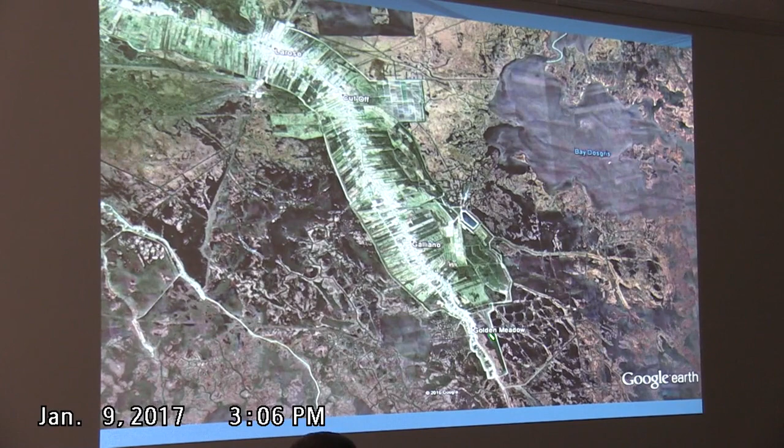But again, there was a New Year's a year ago that we were still very concerned about. This is the Yankee Canal levee. Of course, this area and the bay is not on the pump, everything else is on the pump. This levee was about barely a 2-foot elevation, and in a couple of spots it wasn't wide. When the water elevation got to 1.5 feet, it wasn't wider than maybe 18 inches. So now we have a 5-foot levee, and the crown is right at 10 feet. So that's one area that was scary last year, but it's in great shape right now.

The other scary area is over here in the coastal canal where we had the sheet piling project going on. Of course, we had to cease and desist from the Corps.

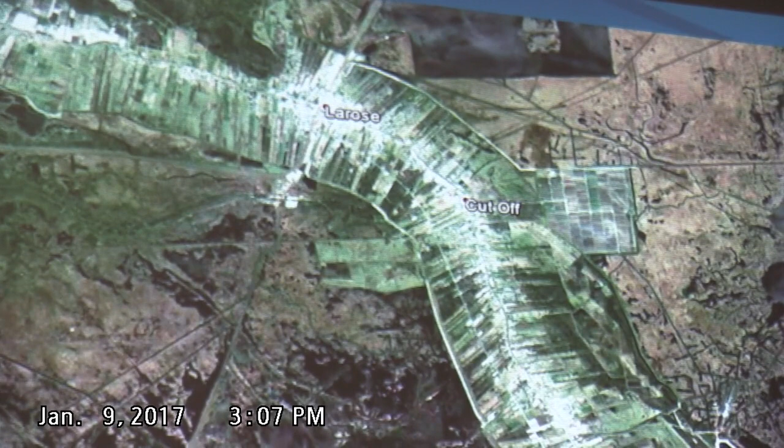We went to get them to take it off of us because there was one area that was extremely weak, and we were truly concerned about it. The Corps agreed with that, and we got that done a month and a half ago. The key thing is the contractor was there with equipment. Had we had a storm, he could have worked 24 hours and taken care of that problem.

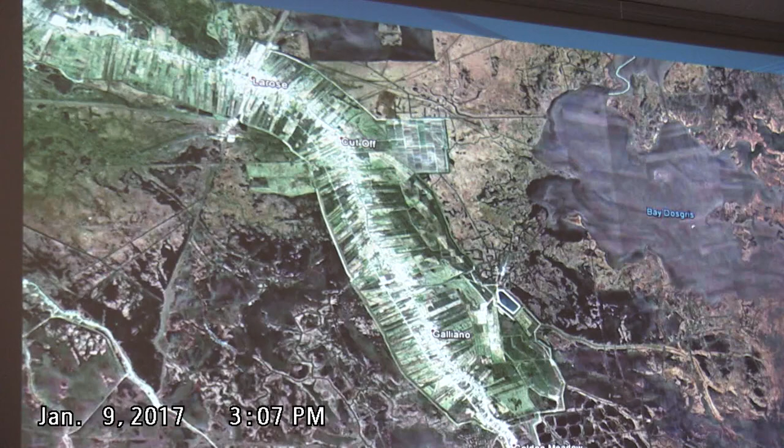Now we just have one little gap left to do where the shipyard was. He's going to leave that open while he continues finishing the other part of the job, where he has to put in sand and put rocks on top of the sand between the old wall and the new wall. There we've gone from a 7.5-foot level of protection to 13 feet.

That was kind of critical because with those big slow storms, we're going to get the same amount of water here as up here. It would have been a shame to keep the water out everywhere else and have it flood the whole system from up here. But that's in place now, so we'd have to be really unlucky for that type of thing to happen. So those are 3 major things that were done for us this past year.

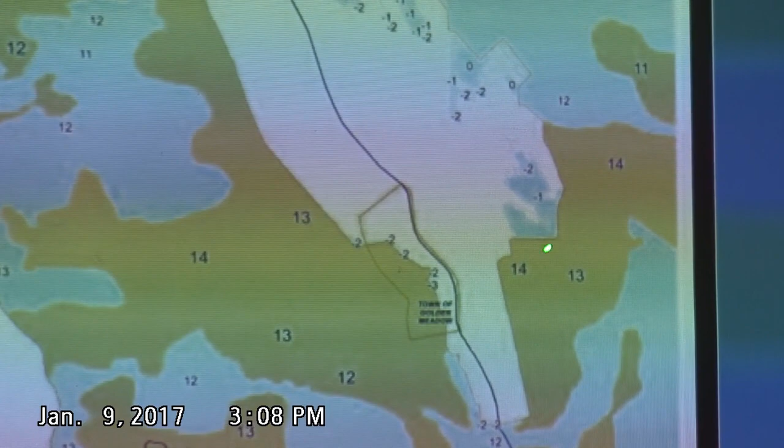The other thing we received is the map from FEMA and the flood insurance program showing the elevations on the outside of the system. The outline doesn't show real well, but we basically show 9 feet up here, 13 on the west side, and it's all different over here. They think the water's going to stack up to 13 here, showing 13 over here but 12 to 14 elsewhere. Here we have our levee at 18, and up here we're in the ballpark of 15 and 16, and we're going to continue working on it.

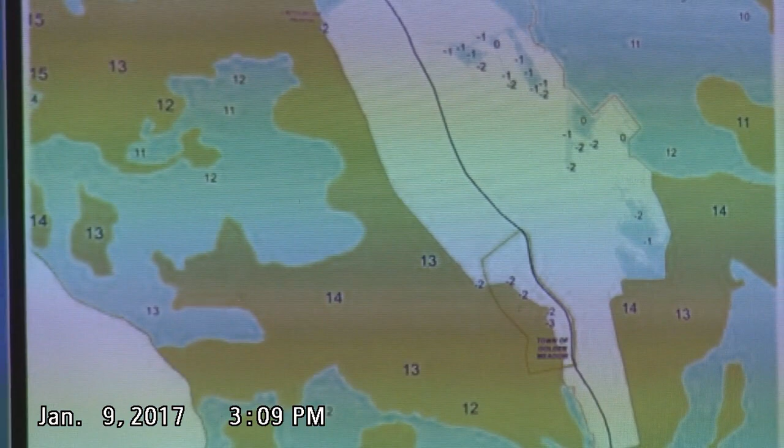What's important is now we have a map. After Katrina, we just decided to build as big a levee as we could afford, as high as we could, and figured 16 on the south end and 13 on the north would work out pretty well. These computer models, 10 years later, show us we were pretty much in the ballpark. Our goal now is to keep at least 1 to 2 feet above that outside elevation, which means we'll need to do a little bit of work globally and a bit in the corner over here. Most other places, we're sitting in really good shape.

We will continue our project, and we can have 18 up to here, 16 around here. We have a good chance of getting to 16 all the way through here, since they show 13 here. With the projects we're about to get started this year, it might take a couple of years to get there, but we're in good shape.

We're still able to get the benefits of our flood insurance program right now. We're returning money to people because there was a slight change in the law, and we're looked at as a reduced risk area because we hadn't flooded it since 1985. So I'm hearing people are receiving some money back on their flood insurance, and that's going to continue. With this LAMP program, it looks like we'll be able to keep that advantage.

We still have not been certified by the Corps of Engineers, and that continues now. But the LAMP program will allow us to get the benefits of the system we're building, and we need to continue to make sure it stays at the elevations we've designed it for. Any questions?

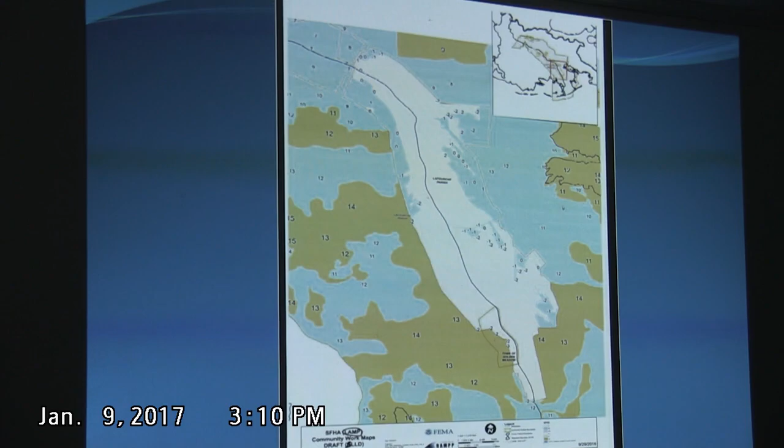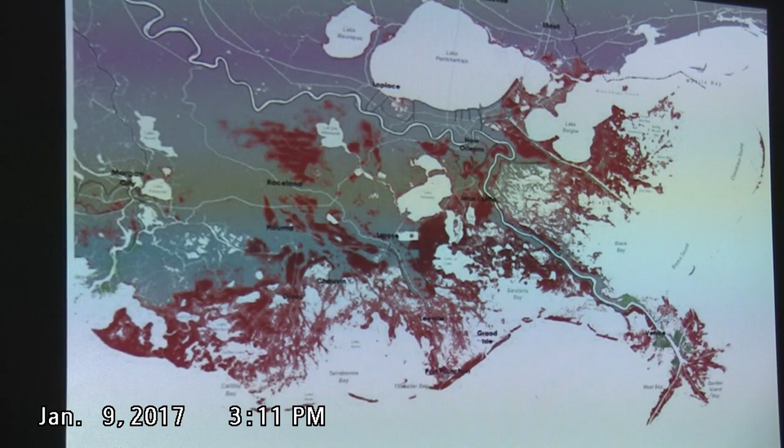This past couple of weeks, the CPRA, the Coastal Protection and Restoration Authority, the state, released the master plan. With sea level rise factored into their computers and subsidence still the controlling factor, they're saying if we don't do anything, these red areas that were land or marsh would turn to water.

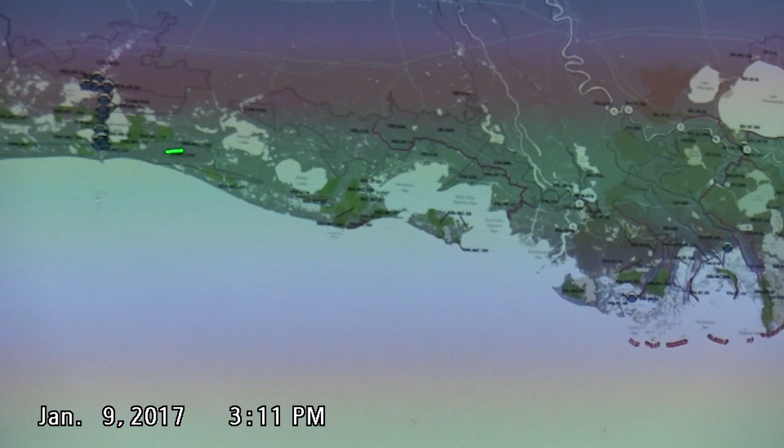Their plan, in this same area, you can see here's our levee system. The red lines are levee systems. What's interesting is we have levee systems over here in southwest Louisiana, but they show no structural protection there. They're talking about just helping people to move out, basically.

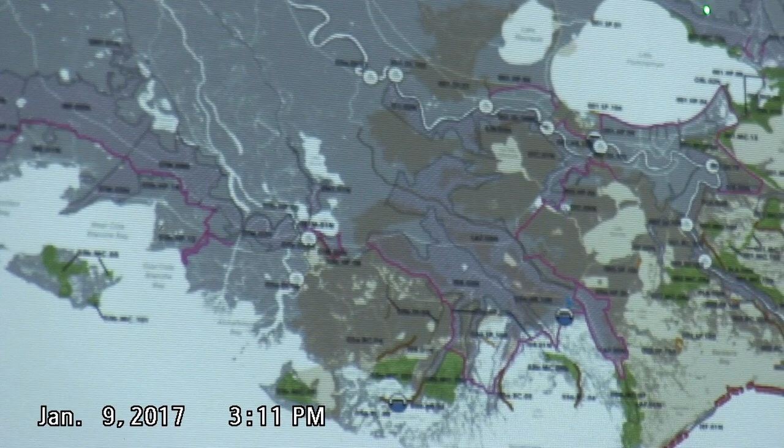You'll also see up in the Lake Pontchartrain area, in St. Tammany Parish, they're saying there are 5,000 structures that they're going to either elevate or help people leave. Now, the plan is a very expensive plan, and the money for the plan is not there.

We are going to have a lot of money from BP to get started, and most of that is going to be just for restoration and not for flood protection. So when we continue doing our work over here.

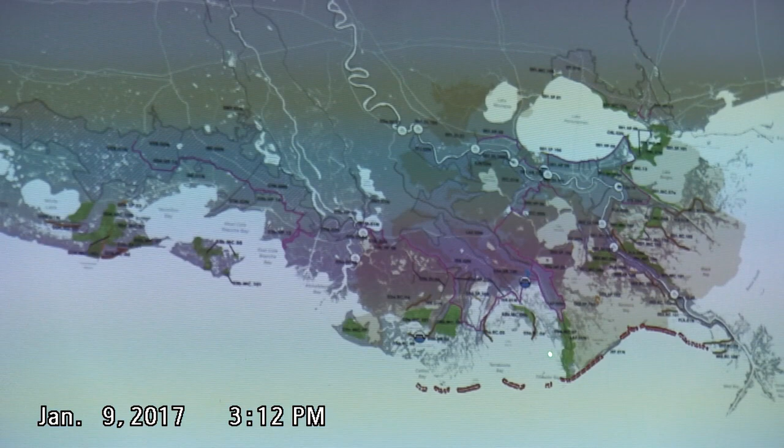Part of the plan is to reestablish the marsh along the Lafourche Ridge. That's critical for a lot of reasons, but if we don't keep this separation between Barataria Bay and the Timbalier Terrebonne Bay, the water is going to be moving around so much it'll cause a lot of problems.

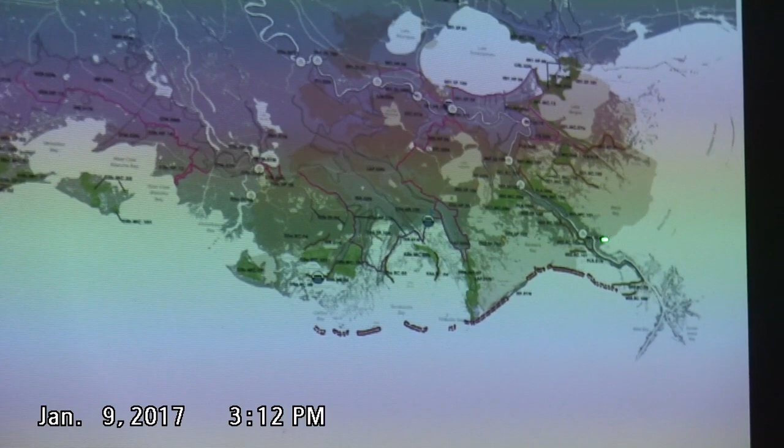For the island work they're planning to do over here, that's real good for us. With Plaquemines Parish being sturdy and the island chain staying in place, that's going to help knock down storm surge before it finally gets to our levee system. That's a real good thing.

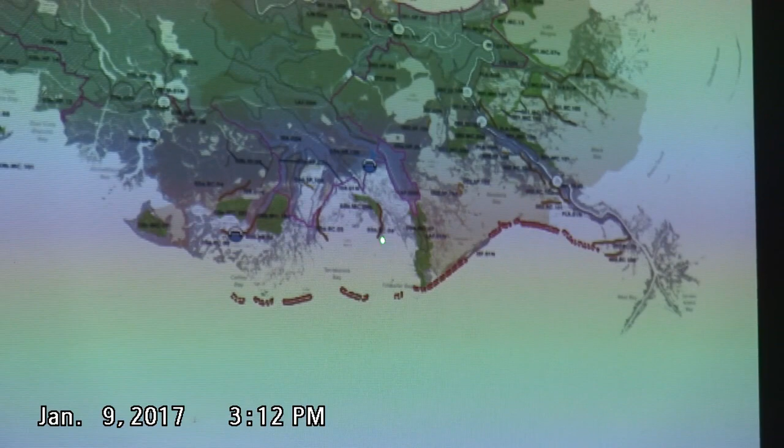One of the issues we have is a storm coming from the southwest to the northeast. The islands aren't very good, and we don't have a lot of strength behind it. They are looking at strengthening the Bayou Terrebonne Ridge. That would be helpful. And if we can get something between the Bayou Lafourche Ridge and Terrebonne Ridge, that could help knock down the water. That's something that, working with other people, we might be able to get going.

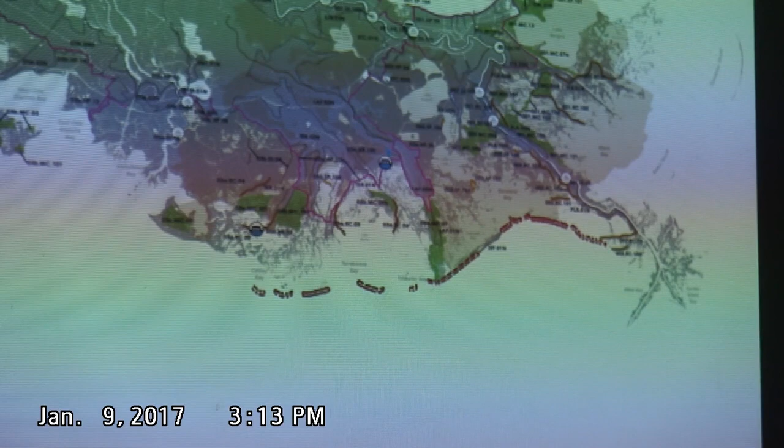But they are saying in this plan, which is being painfully honest, that we cannot restore the entire coastal Louisiana — we will not be able to do it. But what we can do is manage the loss pretty well, and there are places we can keep if we want to. That's really what the plan is about — keeping the areas.

They're shown right here with some different types of projects — the various islands, marsh restoration, and some diversions. They think we can hang on to what's on this picture here. But there are going to be some big challenges all over the place.

And the money is not there to get it all done. The biggest amount of money we have for it right now is the BP oil spill money, and that's kind of a hell of a way to fund your restoration project — hoping you get an oil spill. Yeah, it's not a good situation.

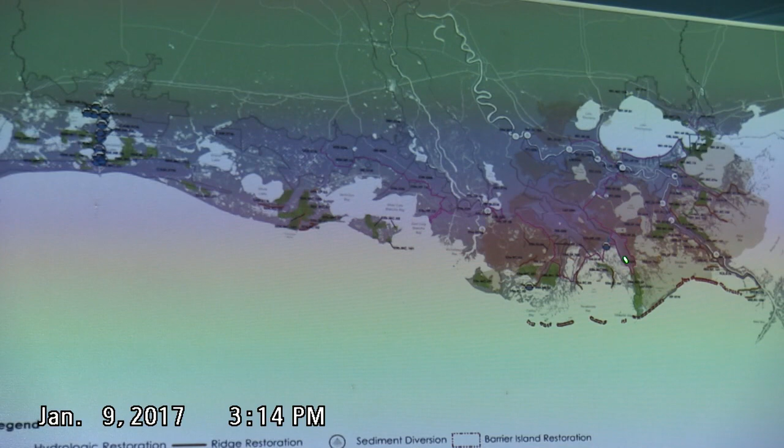But we have been successful, and we are in the plan. A lot of people are not in the plan, and there's a lot of people not totally happy because it doesn't show their project. If a project's not in the plan, the state will not spend money on it. We are in the plan, and they've put a lot of money toward it on paper, but as I tell you, there's not enough money to do all the things that are on this plan.

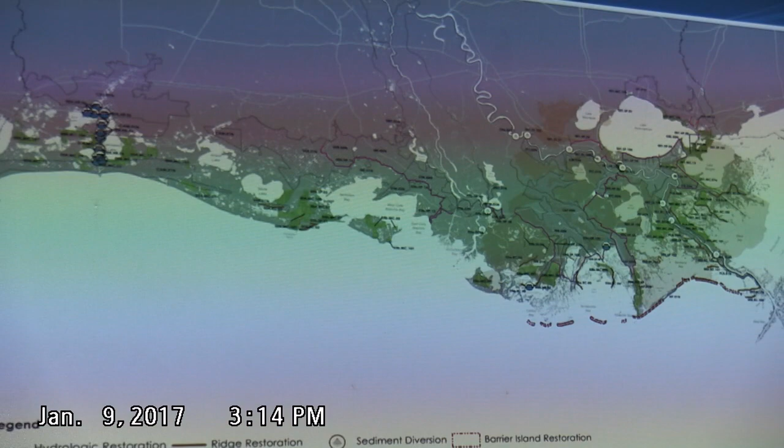This is some of the work we're doing for the Morganza project. There are a bunch of trees along the levee where we're going to build. This is the Grand Bayou, and they started clearing trees, so we decided that getting a chipper instead of just cutting it and trying to burn it would let us get it down without spending as much time and effort.

Here's a machine taking some of the area out and clearing it, and here's a good run — it's ready to go. And there's the chipper doing its work. You don't have to move that stuff around, you just leave it.

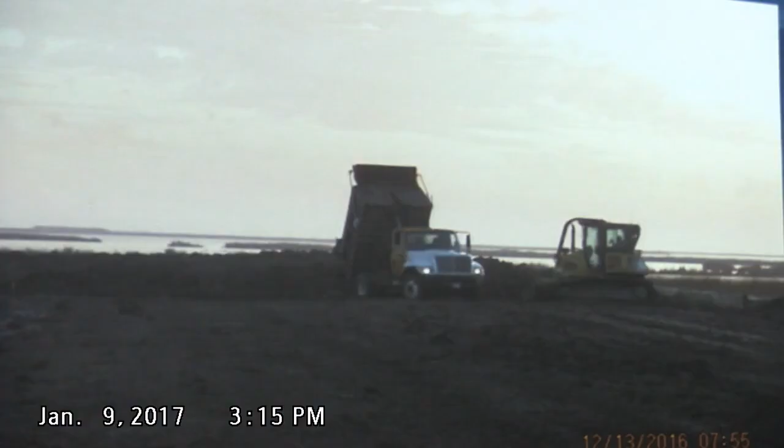That's a little segment at the south end, and the Grand Bayou project should continue from this and go forward. We ought to have plans on Grand Bayou within the month, and then once we review it, possibly get advertisement and maybe get a contract out there by spring. That's a big project — a 6-mile project with material. And again, that's the guys doing the work in the area.

Okay, next item is the LA1 Coalition. We've been a partner with them for the last few years, and we reviewed the membership. It's $1,000 for that membership. I have a motion to approve the renewal of membership.

Do we have to do the cooperative endeavor agreement? Yeah, it's in. We've done this already? Yeah, it's the same over here, same one we've done in the past, exactly the same one.

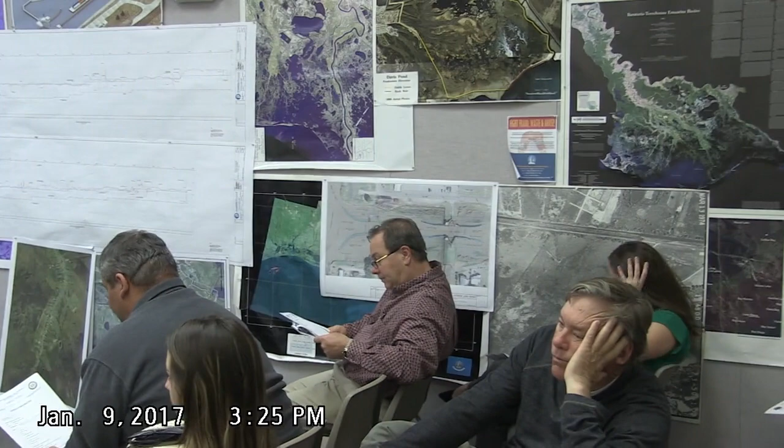Entergy costs to relocate the power pole to the Apache Dock. Every time we get inspections, the Corps has mentioned that we do have that power pole in the levee, right near Apache Dock. There is, the old wall actually sits in there. We don't think there's too much of a threat, that's why we didn't jump on it right away. But now that we're gonna try to get the Corps to approve some of our stuff and also work toward the flood insurance issue, I think it would be a good idea that we do relocate that power line.

It will cost about $17,000. So if y'all approve, we'll go ahead and give the Entergy company the go-ahead to relocate that line and that pole. Expensive pole. Actually, two of them, 17,000, maybe more, it's two of them.

He's making a recommendation to our general manager to expend $17,000 and some odd dollars to Entergy for the relocation of poles that are in our area right now. Moved by Mitch, second by Bob. Any discussion? All in favor, signify by saying aye. Opposed, no. Motion carries.

Okay, getting approval to pay the cost, it's actually 15,851 dollars to relocate a Vision Communications cable at the Ontario lot. We're working to raise the road where the gap is. To do that, we have to move the vision cable out of the way. Even though we don't have the advertisement out yet, if we don't do this now, it'll slow us down when we finally start getting the advertisement.

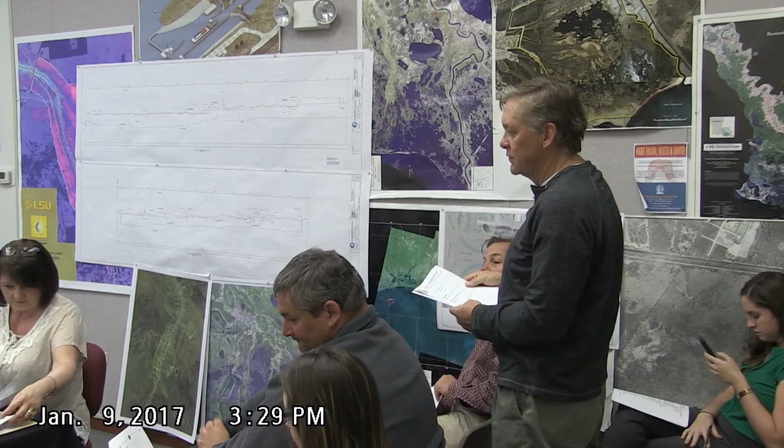On the elevation at LA 3235 at Highway 24, we did answer all of CPRA's questions. We have a conflict between facility planning and DOTD's comments, and we're working to resolve that with DOTD right now.

I expect any day now we should have that resolved, and we can go out for bids. Once that's resolved, we'll get a permit from DOTD, and we'll get approval from facility planning for the running. So we got a shot to get it done August 15th?

Yeah, I think so. On the mechanic shop, we did receive bids in December. We do have a low bidder, a contracting group from Thibodaux. The contract documents are complete with the contractor, and we're scheduling a pre-construction meeting for next week.

We'll start sometime probably next month. Money-wise, you were doing great, Joe, till you got to the third. Well, you don't owe this money right now, that's a total. I know that, but we're gonna have to spend it eventually.

So at this point, you're just informing us. Yes, sir. Okay. Any questions of Joe? That's it? Any questions of Joe in the presentation?

If not, we'll move on to Jay Wayne. So our permit for the water control in Golden Meadow, we got just about everything, and that permit is good now. We're waiting on geotech to handle the Corps. He's asking us about how we're gonna tie in our mechanical levee to the levee. We've got a good check on, doing the work right now, we're waiting to come up with some results.

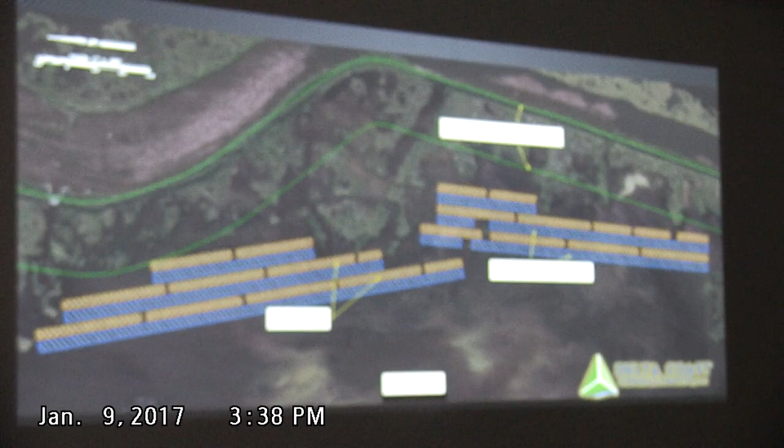This just kind of shows you what they're doing. They're borrowing the material adjacent and building these terraces. We normally have a cut in them every 750 feet, or no more than 750 feet.

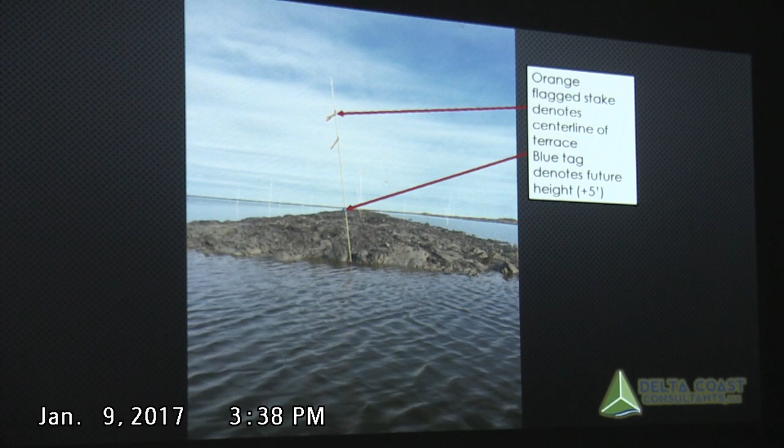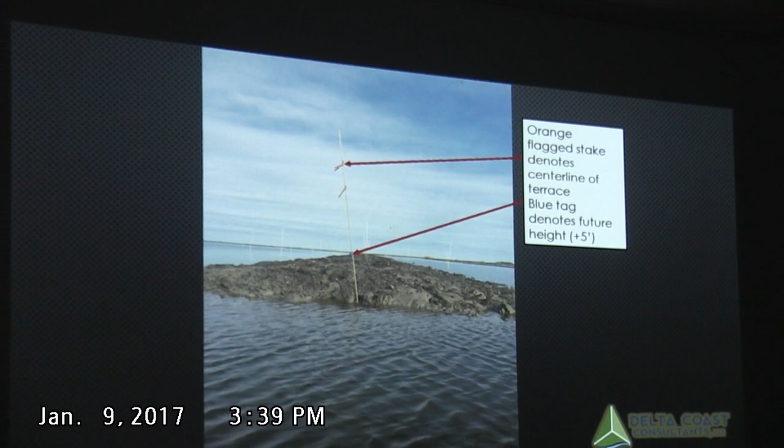Just to give you an idea of about what they look like now. Bethany, who's with my office, took a trip out there on Thursday. Bethany is from Cut Off. Right. Catching fish while you were there? I was very tempted. Everyone needs the one from Lafourche Parish. That's right, we all know Lafourche Parish is better. Thank you for admitting. Yeah. Most of my office is from Lafourche.

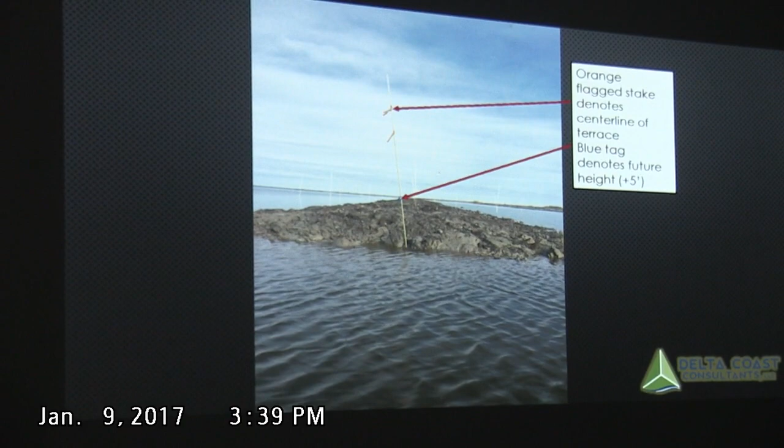I guess it's successful about what we're doing. Yeah, the little blue flag shows the final elevation on these terraces, which is 5 feet. What we're doing is building them to 5 feet because we know they're going to settle, and hopefully they'll settle down to about 2.5 feet, which is what we expect. For mitigation and credit for having functional marsh, they don't count anything above 2.5 feet, so it's got to be 2.5 feet and less to be counted as marsh. That's how we design these things, to have 50 feet or so of width at or below 2.5 feet, and then they count that as functional marsh.

Interesting enough, as we're going through new permits right now, they're starting to tell me that if I want to do terracing, I have to build even more than what we originally requested, because they don't like terracing as a form of mitigation now. So those are the different hurdles that we have every day. What we do is go out and lay these things out with cane poles, and the operators know exactly where to build and borrow from here. And you can see that.

The spacing between them is about 180 feet center line to center line. They say it takes at least 300 feet for waves to start building up, so we're stopping any wave action in this zone.

And we've seen how well these have held up on the other side of the Pointe-aux-Chenes Wildlife Management Area. But anyway, we're going to keep doing this, double teaming it with North Lafourche's machine and Terrebonne's machine till we get all this done. And this is not the only mitigation project.

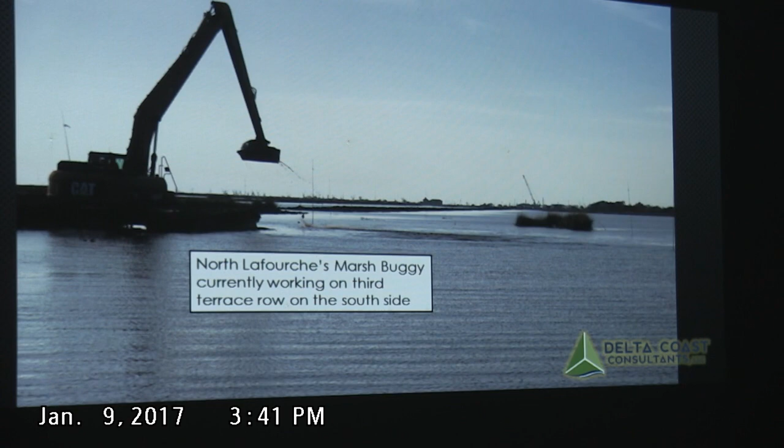I think he's got some stress cracks in his boom. That happens when you're doing this much digging and that much work. We've seen it a lot on the work we've done on the other side.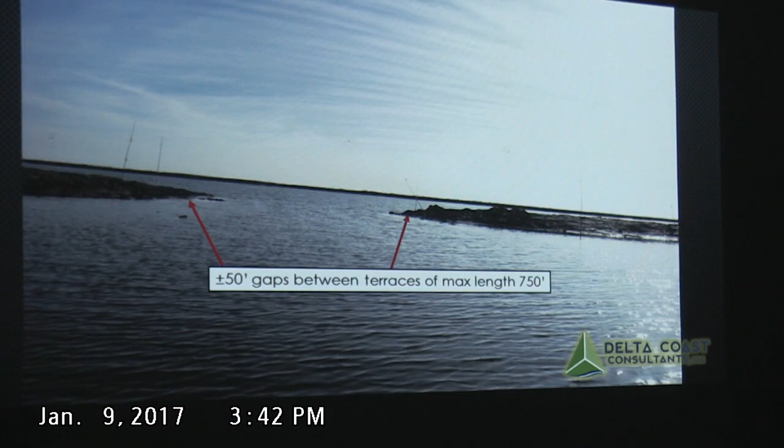But it's really starting to shape up good. That's about probably 2.5 feet. We're looking at what they've got standing up now, so we're going to have to make another lift before we get some complete sections there.

I'll go there. If you have any questions, you can stop me and ask me. That's it, I just wanted to give you a little visual of what we got going on over there.

Go ahead. I'm just saying I don't have anything on any of the other projects. Wendell gave you a little update on what's going on there.

We are starting to meet more frequently regionally with Matt to set priorities for what needs to get done. Reggie gave a little talk in Thibodaux in front of Big a few hours ago, and how important it is to close off that gap.

Not so much for South Lafourche, but for North Lafourche and for Terrebonne, to get the Grand Bayou floodgate built, the Bayou Blue floodgate built, and those levee sections. We have a 1.5 mile gap that we need to address, so that's going to be a high priority for us. It's a high priority ask in our capital outlay request for this year.

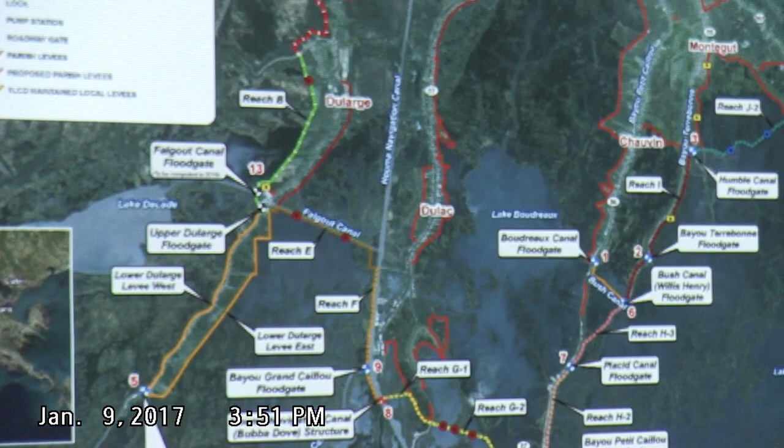But the structure we're talking about today is the Grand Bayou floodgate structure that sits right in this area. Pointe-aux-Chenes floodgate is under construction to the south, and then we have the Apache Farms area, Reach L and Reach K, which is under construction by All South. This is Reach L here, and our Grand Bayou floodgate structure sits right in between those two segments.

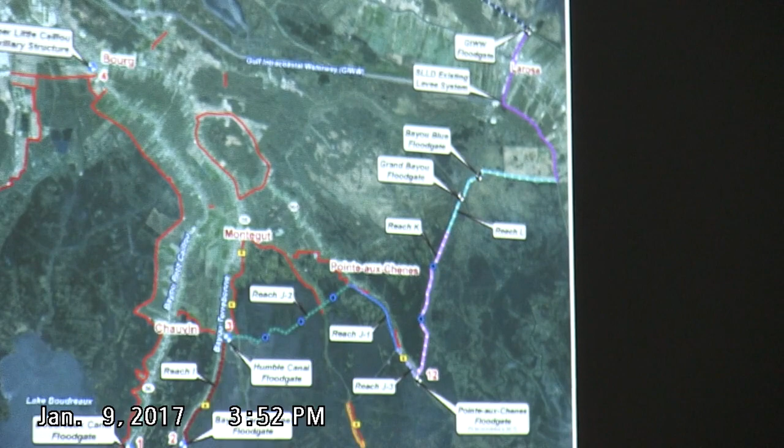So this is a blow-up of that area again, showing Reach K here, the Grand Bayou floodgate structure here, Reach L, and the segment that Neil has under design, Reach L here, and the Bayou Blue floodgate, which he has under design, and the Apache Farms area, which CPRA is handling. So that tells you geographically where the floodgate sits.

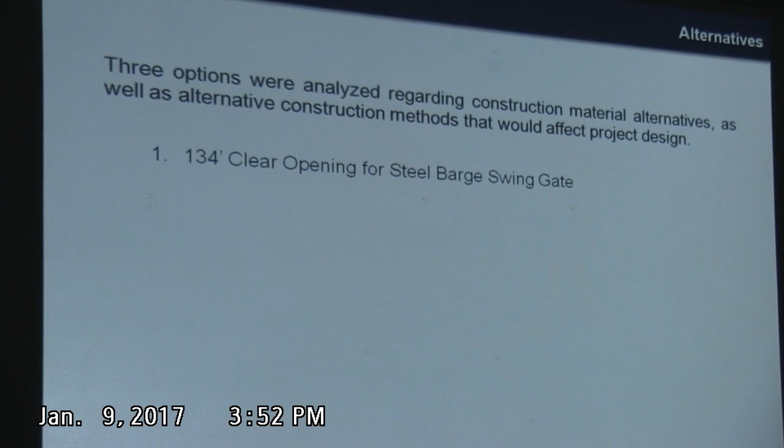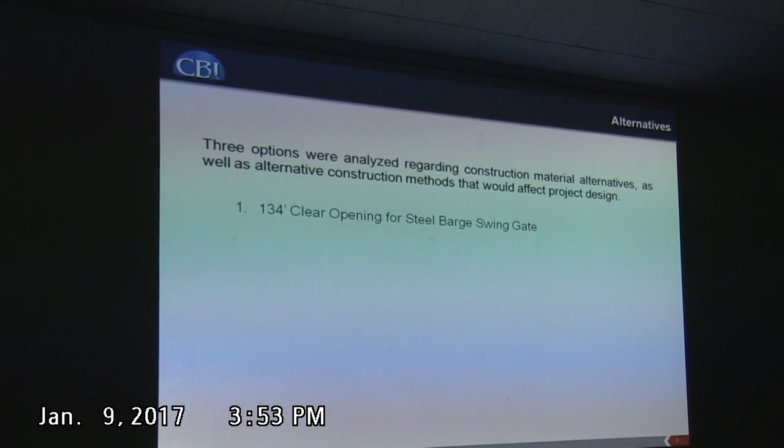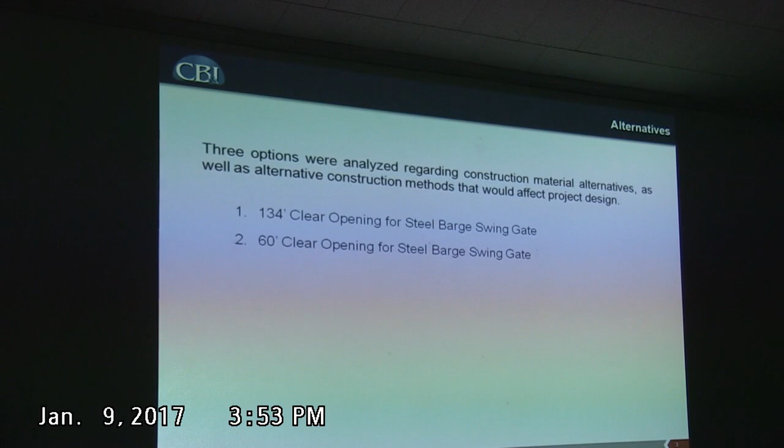As I've talked about in previous months, we looked at 3 options for the floodgate structure. The report talks about a 134 foot steel barge gate — we're talking about a 134 foot clear opening when we speak about the size of the gates. So option 1 is a 134 foot clear opening with a barge swing gate that comes out of that opening. Option 2 is a 60 foot clear opening with a steel barge gate with 5 sluice gates. And option 3 is a 56 foot clear opening for a double leaf sector gate. So those are the 3 options we looked at.

When you look at a 134 foot clear opening for option 1, it yields a 146 foot long, about 40 foot wide, about 30 foot high steel barge gate to a top elevation of 18. It's a 17 foot hull with a 13 foot steel flood wall on top of the deck to get you 30 feet high.

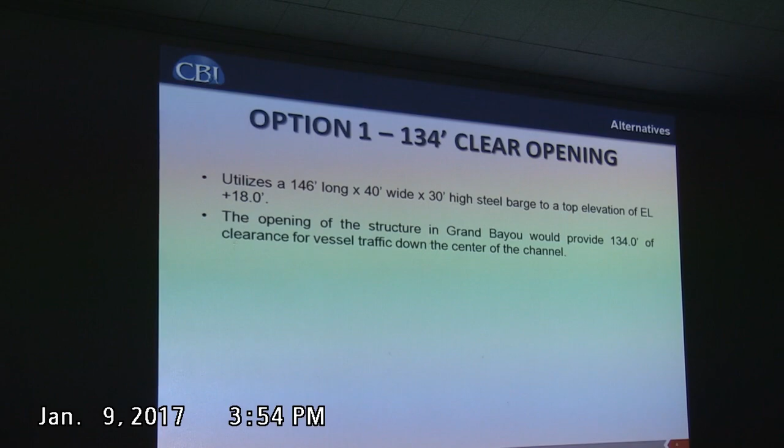So that's option 1. This is a site plan, and I know it's a lot here, and when we get into our recommendation of the structure we're recommending, I'll show you some drawings that we put together, which will give you a better visualization of what all this is about.

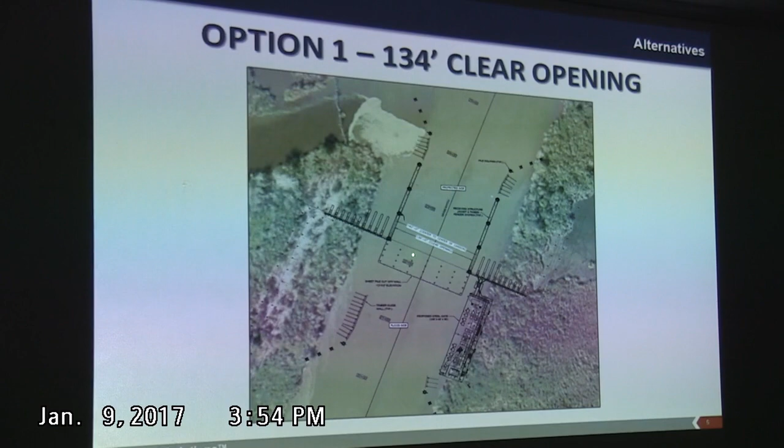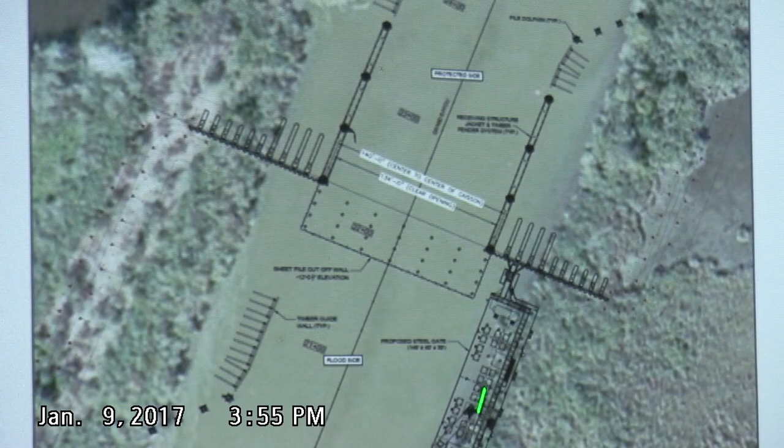Some renderings we put together, but this is just a plan site view showing the steel barge gate in the open position, stored position here. Again, this is Reach K here going to Pointe-aux-Chenes, this is Reach L coming up to Larose. The steel barge gate is in the open position. These are storage areas with vertical piles in each of these areas, the storage area and the landing area. Of course, timber fender system, navigation system along this area, and navigation pile clusters here and along these areas. And then all of this would be dredged to a -12 elevation.

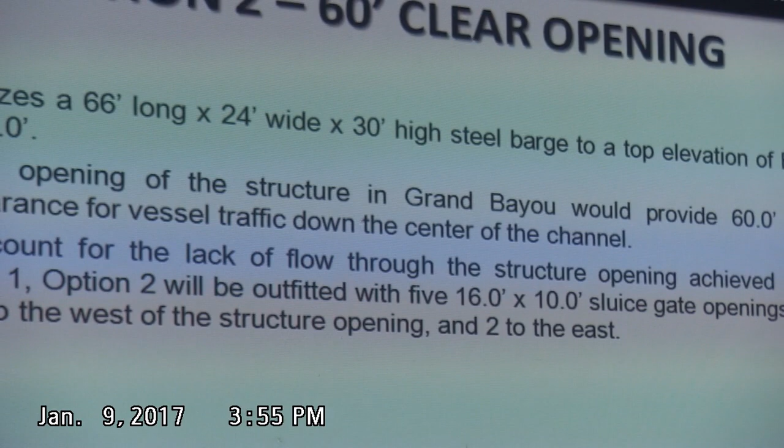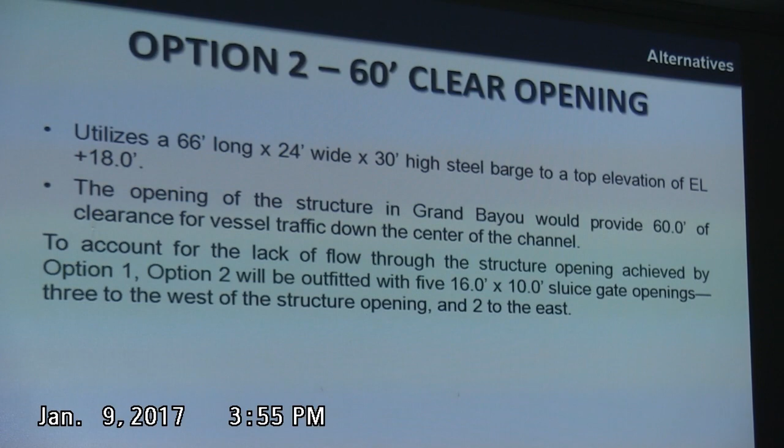Looking at option 2, for a 60 foot clear opening, it utilizes a 66 foot long by 24 foot wide by 30 foot high steel barge gate. Again, all these structures are to an elevation of 18 feet. Now, option 2 does include 5, 16 by 10 sluice gates for hydraulic reasons.

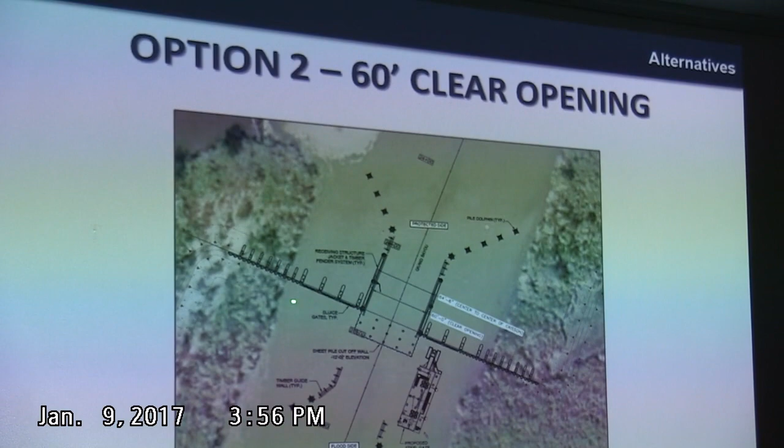Again, this is basically the same site plan showing how that lays out, with the steel barge gate in the open position, and similar structures as we have for option 1. The sluice gates would be constructed in this wall — 3 on this side, and then 2 on this side. And that's the other thing: this is a steel sheet pile braced wall that extends from here all the way to tie into the levees on each side.

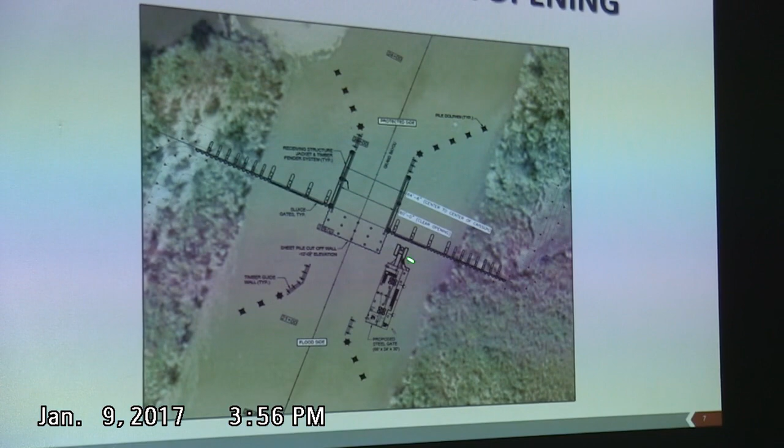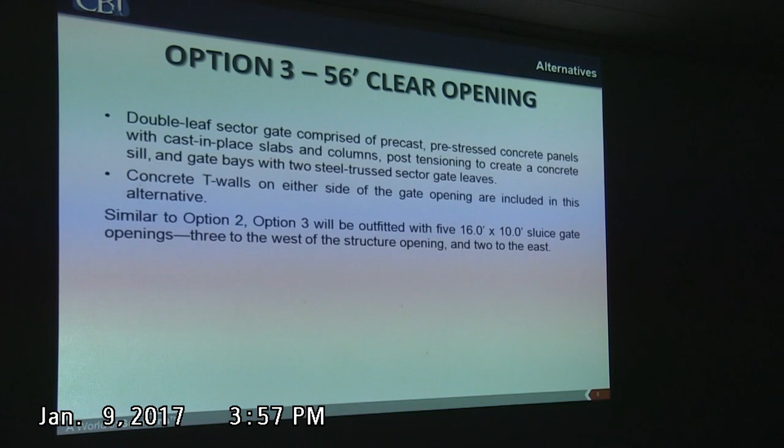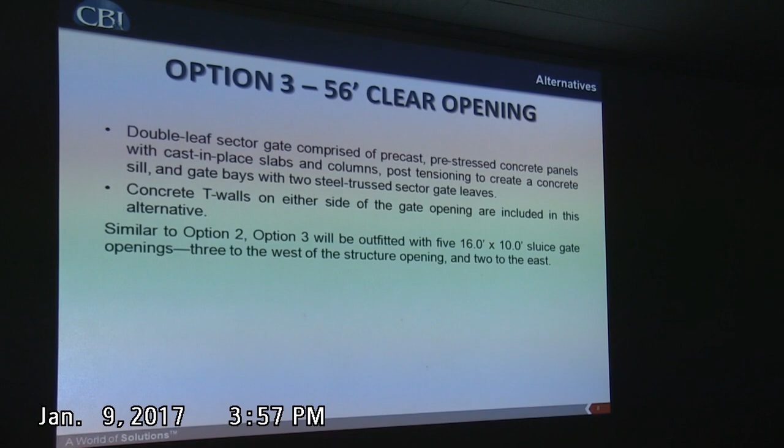And then finally, option 3 is a 56 foot wide clear opening for a double leaf sector gate, which is concrete T-walls, precast concrete panels on each side, with a double leaf sector gate. It's a more complicated structure to construct — it has to be built in the dry. We'll have to build a temporary retaining structure, essentially a cofferdam, to construct this structure. So it's much more complicated, and therefore more expensive as well.

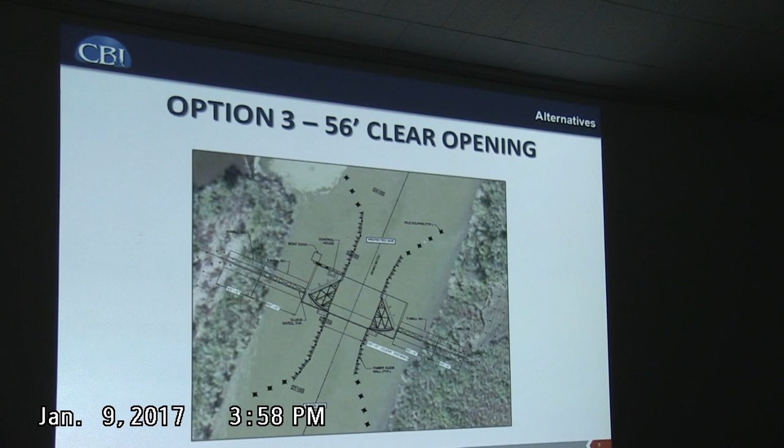You say a little bit more expensive, how much a little bit more? We're gonna get into that in this next slide.

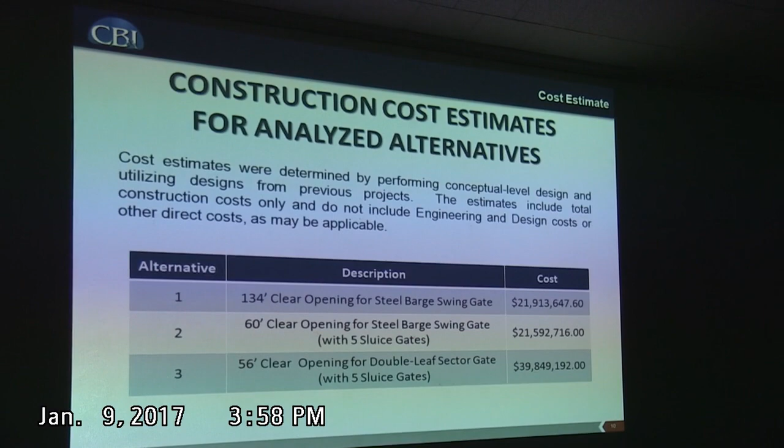When we look at it, we price out all the features. The 134-foot clear opening, 142-foot long steel swing barge gate is $21.9 million. The 60-foot wide sluice gate, swing gate with the 5 sluice gates is almost equal, about $400,000 less, at $21.6 million. And then the sector gate is twice the price, at $39.9 million. Much more expensive structure to construct.

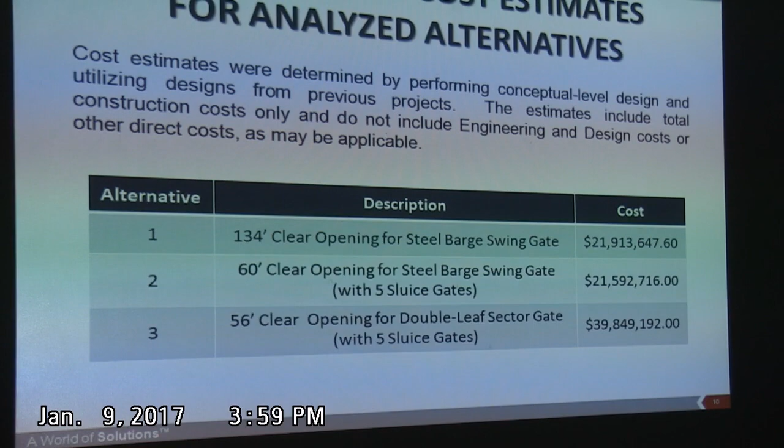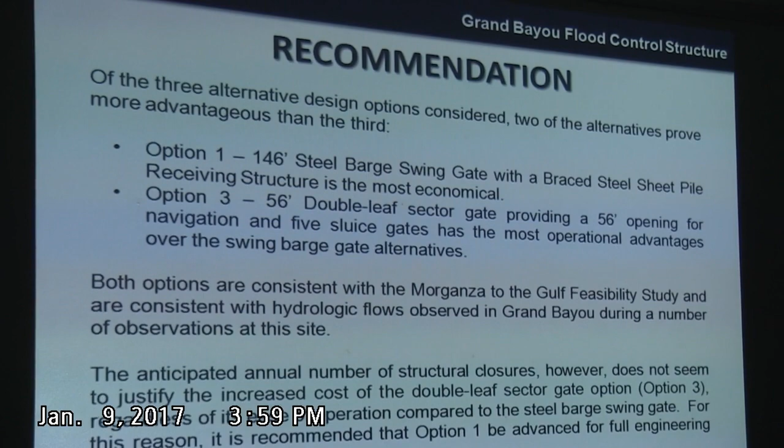So, what we're recommending to move forward the preliminary design is option 1, the 146-foot steel swing barge gate with a braced sheet pile wall. It's the more economical, a little more expensive than option 2 with a smaller swing barge gate with the sluice gates, but this is the type of structure we have all in on the Terrebonne levee system, and we found it to be very easy to operate and easy to maintain. And that is, for those reasons, the one that we recommend the board move forward with.

What kind of commercial traffic would you expect it to go down that line? I don't think we're going to see very much. It's most about just letting the water go through for environmental reasons. They want a big opening because they don't want to restrict flow.

And obviously you recommended option 1 because maintenance over time is cheaper than the cost savings you have with option 2, with maintaining the sluice gates, right? Yeah, that's over time, it's going to be a more expensive option for you. Yeah, that's what we feel - combined cost of operations and maintenance is obviously going to be cheaper. You got 5 more structures that you have to operate in addition to the swing barge gate, so we feel like it's going to be easier operational wise to have just one long swing gate.

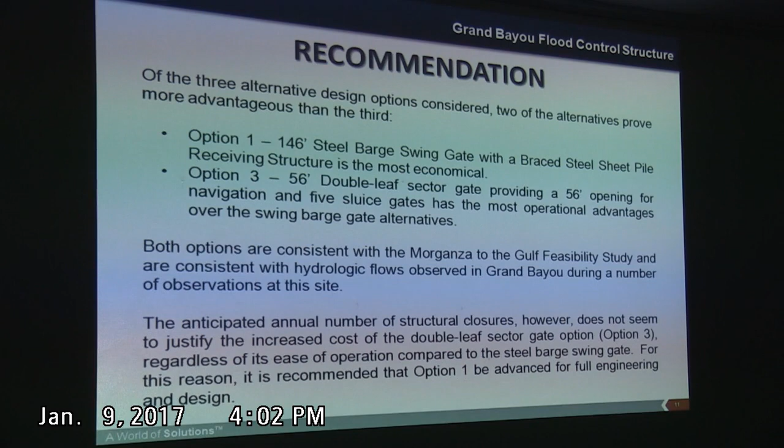I think if you look at flow, that's part of the reason. Yeah, but there's things you can do with flow. Not gonna go wide, but that costs too, so. But it's a good thing to look at. You can, but there's another thing that comes into play - once you change the elevation, it changes your permit. Right now, you can put another structure in as long as you maintain flow, depending on opening. That was your question. Well, once you change that sill, you're revisiting that, so.

You permitted for double leaf going to this, would that cause a problem with your permit? No, we've always set up - when we had permits in the beginning, we had the sector gate. Obviously we wanted to see, everybody loved that sector gate, right? When it came down to it, we always compared it to cost to show the difference in price and what we're dealing with. What we do is present the structure we want. As long as we do not restrict it further or create a flow issue as far as hydrology or hydraulics, then we don't have any issues.

When you start changing sill depth though, that's something we need to work out. I think it's the same argument - if you change the geometry of it, you've got to accommodate it somehow. That's a potential savings though, that's an option. I think that actually reduces the cost. Something we could look at.

Yeah, I don't know, we're at the right stage to be looking at that. Sure, this is a perfect opportunity. Yeah, that would be the time to do it, and it'd be relative to all structures. If you change the sill elevation, that cost won't change in your options or opinions right now.

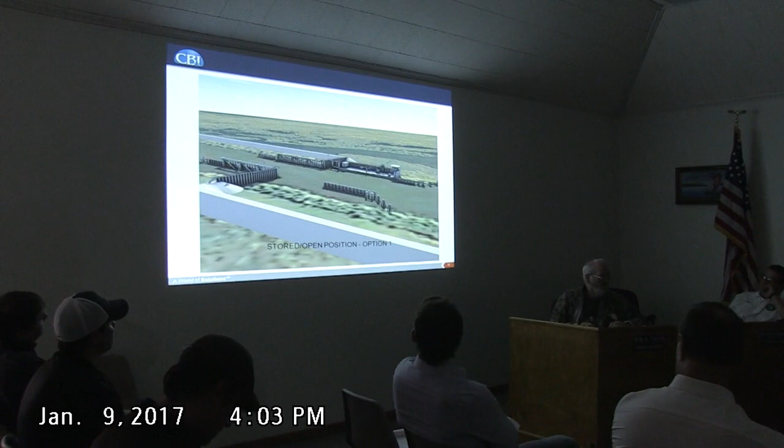So this gives you a better picture of what I was showing in the plan view, and these are some renderings we put together of what it would look like. This is again in the open position - this is toward Lockport, this is Reach K toward Pointe-aux-Chenes, in the open position.

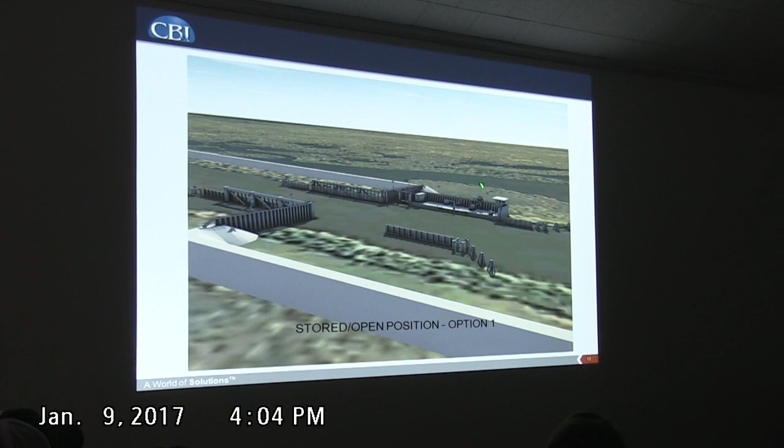Some features: we have a diesel generator here, here's the flood wall. Here's a diesel generator that sits here, a closing winch and a fairlead here, and the operator console at this point. How this operates is that when you're ready to close this, you start hauling in cable. There's a cable that extends from here to a receiving jacket on this side and this side.

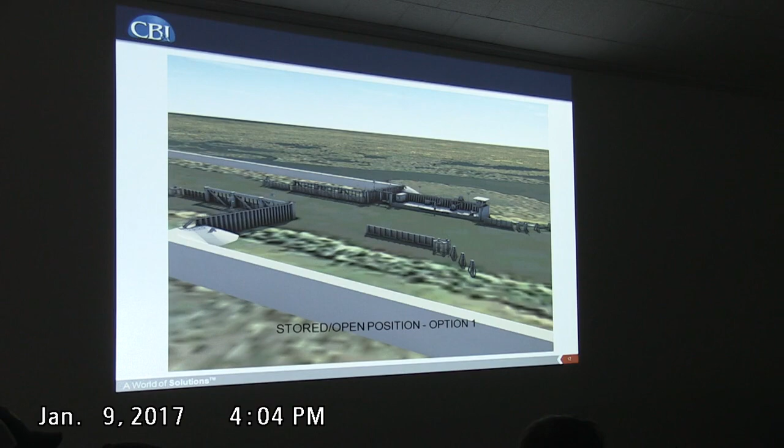This cable is connected to this receiving jacket over here on this pipe pile, and you start hauling in cable to close the gate while letting out cable on the opening winch that sits on the flood side of this. It's just like our old pontoon bridge - it's a winch system operating two winches in tandem with each other, hauling in one and paying out on the other.

Some other features: this is the landing pile, this landing area that I was talking about, and again these are the receiving jackets. These are typically manufactured, fabricated in the shop, comprised of, for this structure, probably 78-inch pipe piles, and then horizontal and vertical bracing.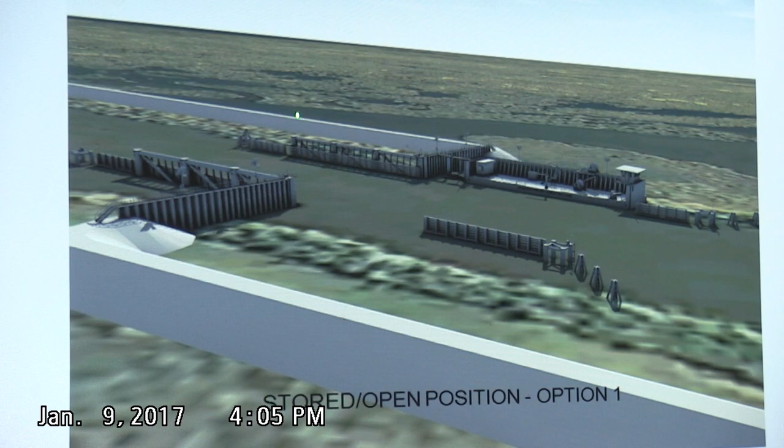All this would be fabricated in the shop and then brought out to the site and sunk. Then vertical piles would be driven through these three or four areas here, and that sets it in place. Then concrete is poured into those driven piles, and the annular space between the pile and the jacket is filled with grout. So that's a robust jacket that we call here on both sides.

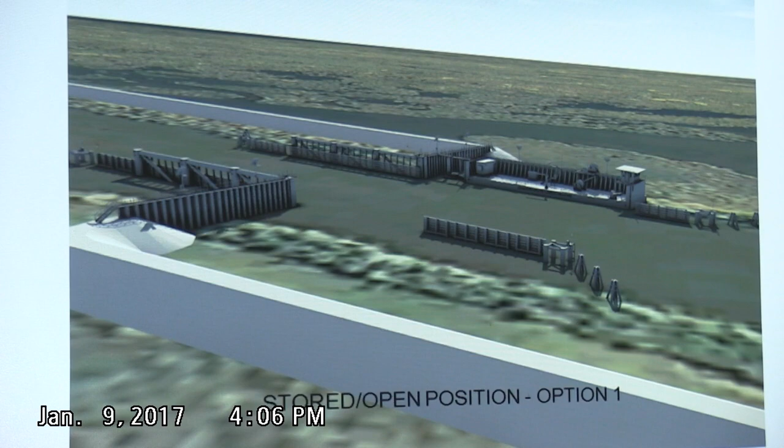And then this is the braced sheet pile wall that I talked about. I have a question - the protected area is to the left? Protected is, and the unprotected is to the right, yes sir. Why is all the barge and everything on the unprotected side?

The tide is coming in - as we move this prior to a storm event, we're gonna close it. The tide would be pushing in from this direction during the storm event, so prior to the storm event we're gonna be moving it, prior to that movement of water. If you get an emergency, if for some reason you're slow in reacting, you want the incoming flood to help close it - otherwise you'd have to fight that flood to close the gate.

That's why - so if you had to fight the incoming tide you'd have these gigantic winches on here that would drive the cost up and reduce the feasibility of doing this a lot. And you don't want to wait too late, because the water might take it and actually slam that barge, and it would be moving. That could never happen. No, that never would. That's really wrong.

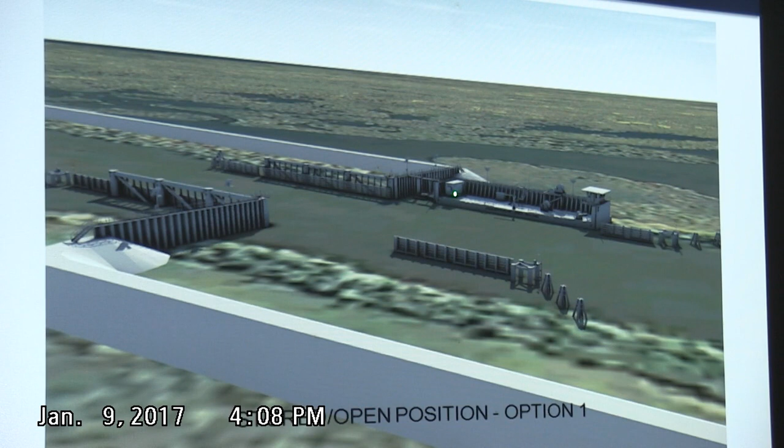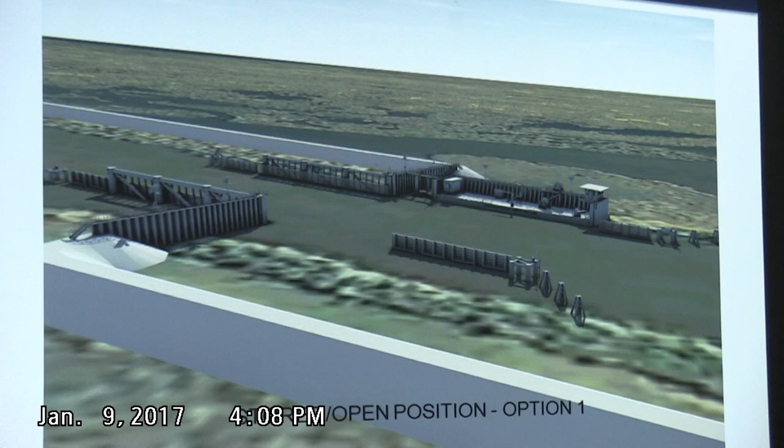So it's not a concrete bottom you're pushing against? No, it's steel, the whole thing—sheet pile driven with a cap plate on top of it. That's done by divers. That's another reason why you want that pressure on the outside.

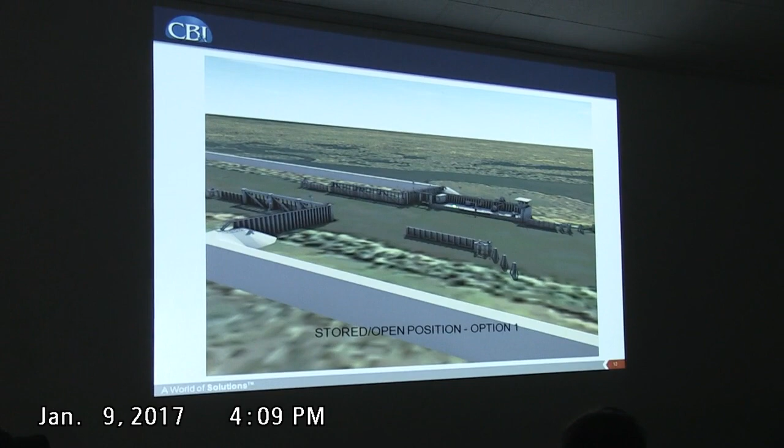How high would the generator for the bubble seal be? This deck is about a plus 5, and the generator would sit about 10 feet high. It could sit on a little platform—we put them on a platform with stairs to get to the generator. On the newest one, the generator is on the flood wall itself at plus 18.

What the diesel generator does is generate electricity for the operation of the electric motors for the winches, and then some floodlights, and then the pumps, the electric submersible pumps. That's the difference too—you have to take water out of the barge, move it, and put water back in the barge to seal it. That's different from the sector gate, that's the big difference.

So what we've incorporated is the submersible pump—that's what you want to see. CBI is the best one we've done so far versus the overall centrifuge-type pump, and the larger barge gets more complicated. They work, that's how Gulf Dub set it up, but we're finding with submersible pumps it's easier to operate—push one button with set points in these compartments to fill them to certain levels, and then one push button to dewater another pump in that same compartment. The barge gate is divided into 8 compartments.

The biggest thing is it increases cost somewhat, but the manpower needed is minimal compared to what the Levee District would need to run it manually, compared to a lot of manual operations like on Gulf Dub, which takes tremendous manpower. So we've set up an automated ballasting system—one push button from the operator here. It's very easy to operate. Essentially, all the operator is doing is operating the winches.

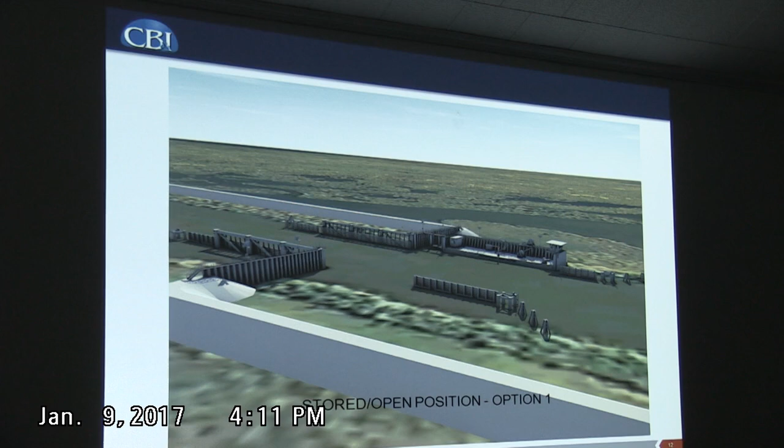Another feature is the flow-through pipes. We have 72-inch diameter flow-through pipes inside the hull, with flap valves on them. When the structure is in the closed position and the water level is much higher in the protected area than on the flood side, those flap valves can be opened to relieve the pressure before the gate is released from the seal, released from the pin. We have a locking pin that locks the gate into place with a receiving lock on this caisson right here. So it locks into place, but before releasing that, we could open those flap valves and relieve some of that head, that pressure, before releasing the pin and opening it.

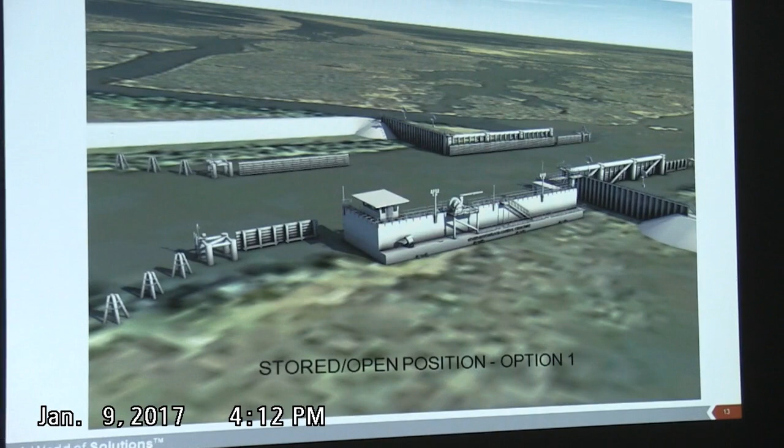What is the depth of the barge? 30 feet—well, it's a 17-foot hull with a 13-foot flood wall, so it drafts about 3 feet. So if this is at an elevation of about 5, then it's about 12 feet below that.

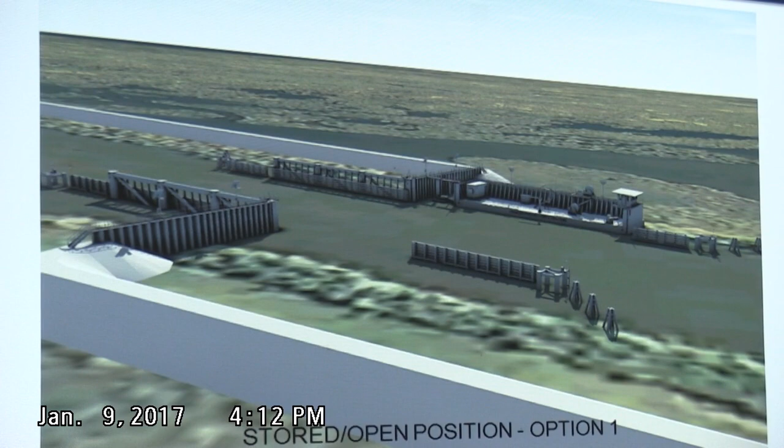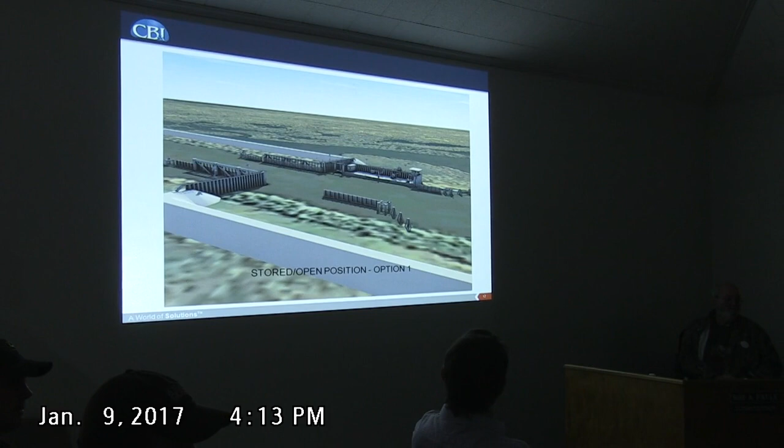So when you close the gate, depending on the size, that barge can go up and down? Right, well when we close it, we would ballast it, sink it, turn the pumps on. But the hinge or the pivot has to be something that allows the board to go up and down. That's correct—that's the other feature right here, a pivot pile, which allows this barge gate to rotate in 3 directions. It can move left to right, tilt left to right, move horizontally, swing, or move up and down.

Yeah, so that pivot pile is sitting here. And there's a pipe clamp. There's a system that we have, a clamp that attaches with fabricated piping to connect from there to the gate.

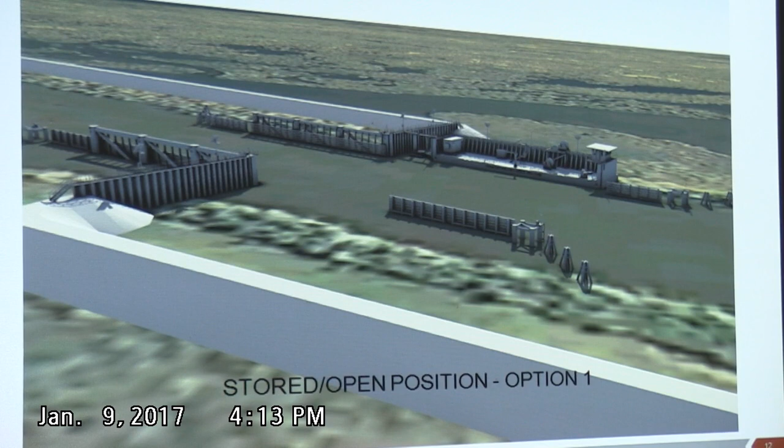Just some more renderings. This shows it again in an open position, but a little more clearer. Here you can see the opening winch on the flood side and the fair leader there. And we would have a pivot pile, a pull structure pile here, which allows this cable to connect to this pile, which isn't shown. That cable is connected as it moves in this direction to close, and is let out and fastened to this pile structure at this point. Again, the closing cable is underwater here.

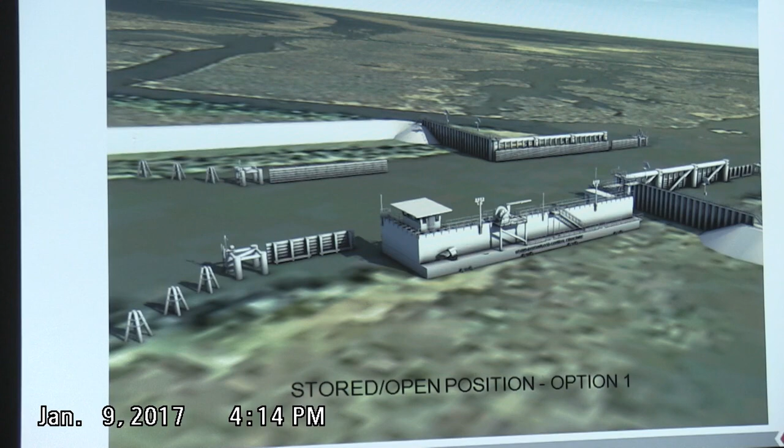How much traffic, what kind of traffic do you have going through the canal there? We don't anticipate any, very little commercial. It's not connected to the Gulf Intracoastal Waterway.

So my question is, why do you need such a wide opening if there's no traffic? For hydraulic reasons, to let the natural flow of the water from the beginning. The whole issue with this floodgate is allowing the water to go up and down Grand Bayou. It's not about boat traffic. The width's not about boat traffic, it's environmental concerns. There's a certain cross-sectional area that needs to be maintained, that's the only way we get that permit.

And that's the only way to get fresher water down to that area between the Lafourche Ridge and the Terrebonne Ridge. As the water then gets fresher, that's a possibility, and that's more what it's put in there for.

Okay, is it Mike? Just a lot of renderings, this is in the closed position. And then just a more inside close view of it, showing the flood wall here, looking at it from the protected side to the flood side.

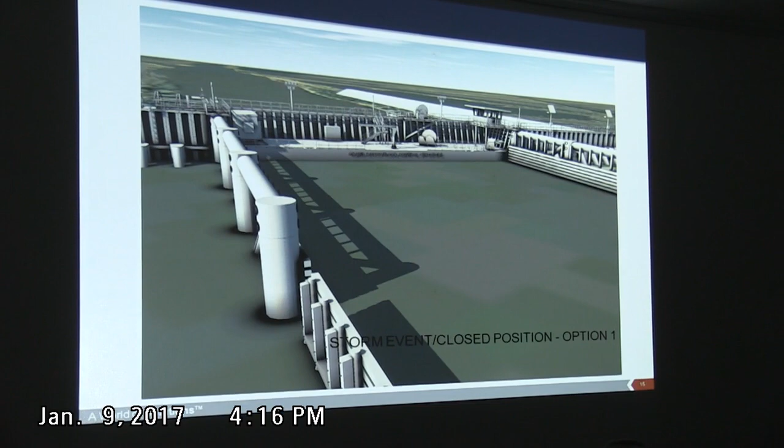So that's where we are, and that's the recommendation we would like to make, is to move forward with that type of structure.

Maintenance and equipment. Mr. President, we put out bid for a new compact excavator. We had 7 people return bids, and the low bid was Levee Tractor for a Case CX57C at $53,587. The committee went with the lowest bid. Recommended by Keith and seconded by Bobby, that we accept this low bid of $53,587.